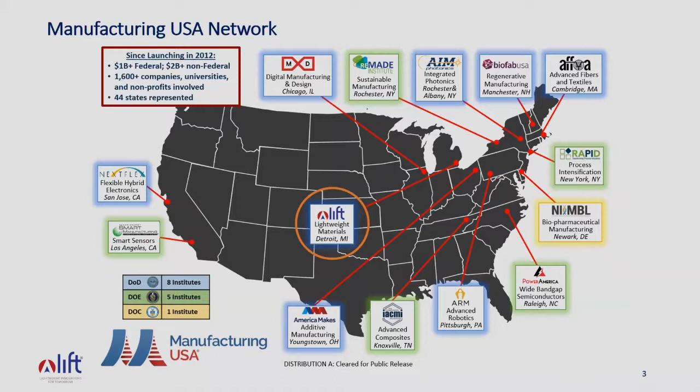And wide bandgap semiconductors over in North Carolina. Some of these institutes are sponsored by the Department of Defense. That is where LIFT is - our main funder is the Department of Defense. There are 8 institutes funded by the DoD, 5 institutes funded by the Department of Energy, and 1 institute sponsored by the Department of Commerce. You can learn more about all of the other institutes either on the LIFT website at lift.technology or at manufacturingusa.com.

A few highlights from what LIFT has accomplished and impacted over the first 5 years: we have over 200 industry, research, academic, and workforce development partners around the country. At any given time, we have had 600 or so engineers, researchers, professors, and economic developers working on LIFT-supported initiatives. Our LIFT facility here in Detroit really has an open door policy - we accept visitors all the time to show them what we're doing, and we've had over 3,000 visitors in the last 12 months. Our work has impacted over 350,000 students and teachers through 40 education and workforce development initiatives around the country.

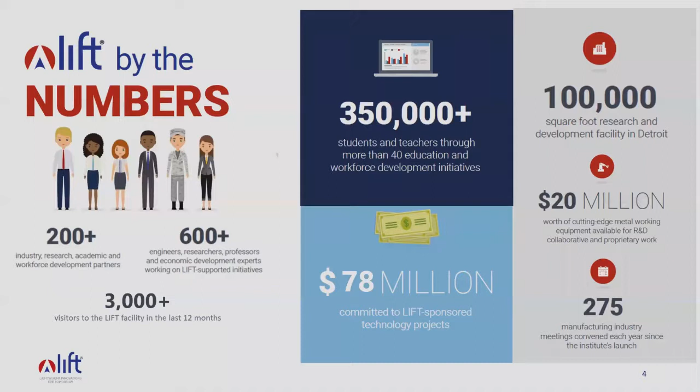We've invested $78 million in technology projects. We are here in Detroit in a 100,000 square foot facility that we share with IACMI, one of the other Manufacturing USA institutes you may have seen on the map in the previous slide. We have $20 million worth of equipment on the LIFT side, so we are very proud of our facility and the work that we've done. I encourage you to come visit us next time you're in the Detroit area, or make a special visit to come check us out and see what we're up to.

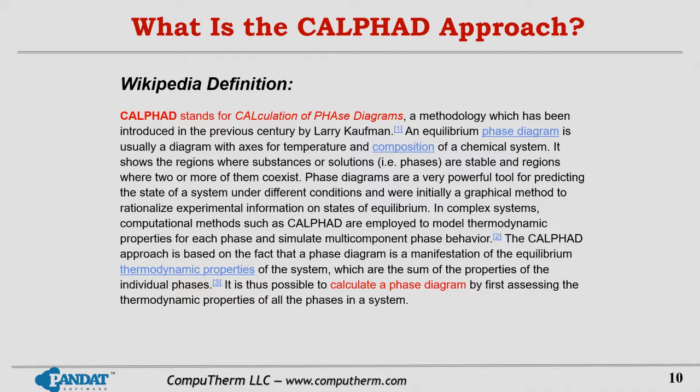So a little bit about the CALPHAD approach - if you Google the definition of CALPHAD, this is what you will find from the Wikipedia definition. Basically, it tells you that Professor Larry Kaufman initiated this idea about 60 years ago. And right now, it has actually become a very important building block for ICME and MGI. As the name stands, CALPHAD, the initial idea of this CALPHAD is for calculation of phase diagrams. Even though its approach has gone a long way now, it can do a lot more than that.

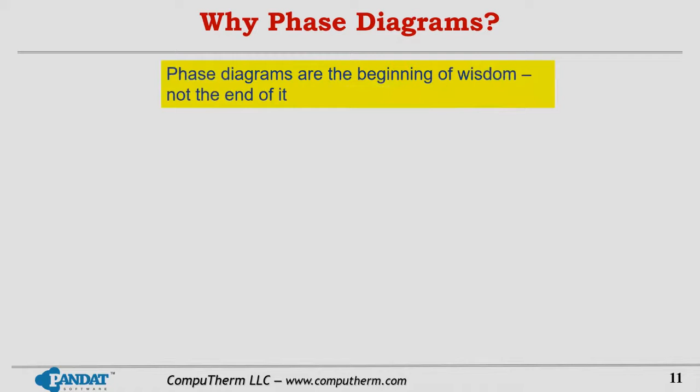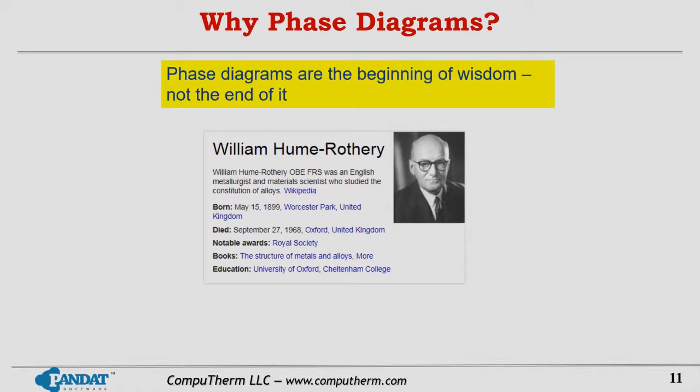Then the next question you may ask is, why phase diagrams? Well, phase diagrams are the beginning of wisdom, not the end of it. This is the famous quotation by William Hume-Rothery. If you do not know this famous person - if you are a TMS member, you know this is a very prestigious award from TMS, which honors those who made significant contributions in the field of material science and metallurgy.

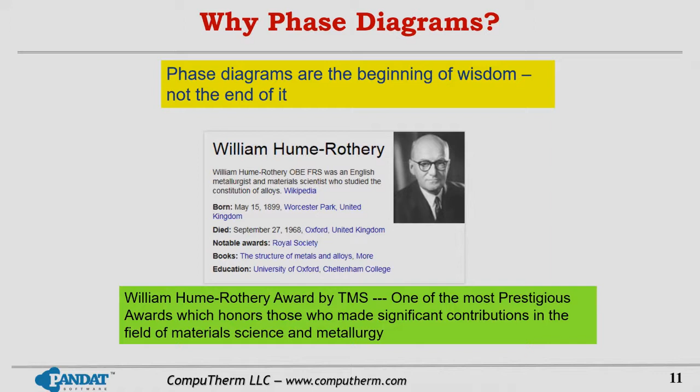Now you say, okay, I agree phase diagrams are very important for materials design. However, I can find a lot of phase diagrams from handbooks. So what's the big deal about the CALPHAD approach? Well, from a handbook, you get the phase diagram. That's what you get, right?

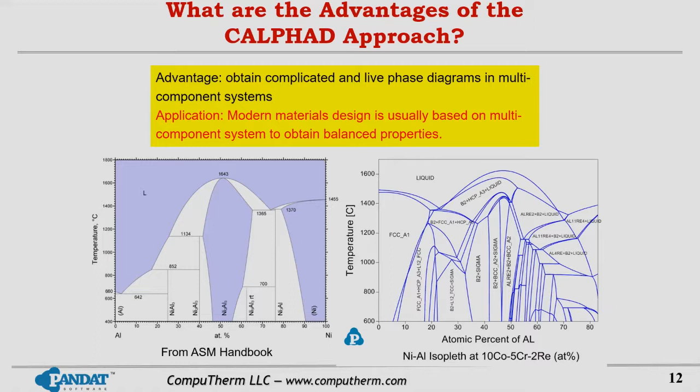Well, this is the advantage of the CALPHAD approach. Basically, we can calculate multi-component phase diagrams, and it's a live phase diagram. You can get a lot of information from the calculation, not only limited to the phase diagram. You can also get a lot of thermodynamic properties and things like that. And this is very important for modern materials design, because modern materials are mostly based on multi-component systems, right?

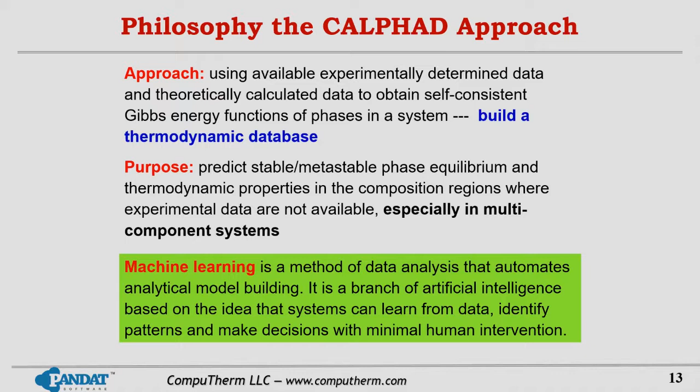So I wouldn't say the CALPHAD approach is a machine learning approach, but if you compare these two approaches, they're based on similar ideas. Basically, we use available experimental data to build models and model parameters, and then we use the models to predict information that we don't get from experiments, right?

Okay, so let's use a quaternary system as an example. You probably will not find any phase diagrams for this quaternary system in any handbooks. However, we know this quaternary system is built up by 4 ternary systems, and each ternary consists of 3 binaries. So these 4 ternaries share binary systems. So in this quaternary system, we have six binaries and four ternaries.

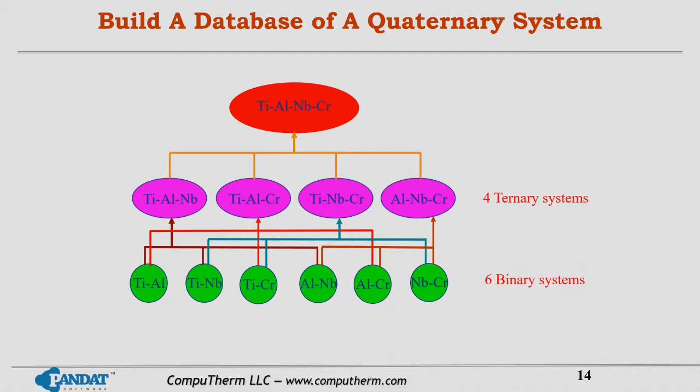So the idea is to use available phase diagram and thermodynamic property data of the binary systems, and also some data from the ternary systems, to build up a database - I mean the models and model parameters - for this quaternary system. Then we can predict the phase equilibrium in this quaternary system.

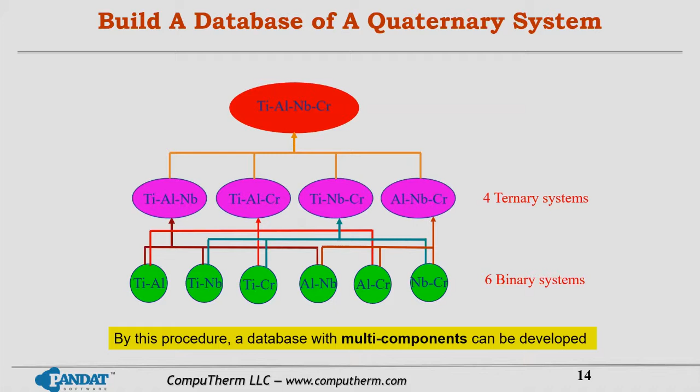So based on this idea, we can build up a multi-component database so we can predict the phase equilibrium information in multi-component systems. So that's basically the idea of the CALPHAD approach, right?

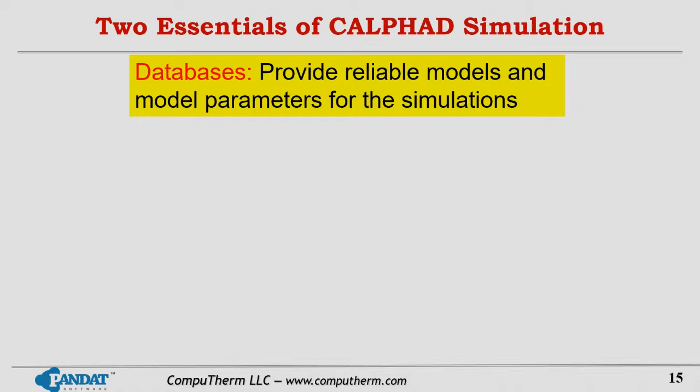But now, okay, I just talked about how to build up a multi-component database which provides reliable models and model parameters for simulation. But that's only one of the essentials of the CALPHAD approach. It's just like you're cooking a meal, okay? Ingredients alone do not make a good meal, right?

So you also need cookware. That's why we need good software to perform the calculations. So basically, two essentials for the CALPHAD approach are: one is the database, the other is the software, okay?

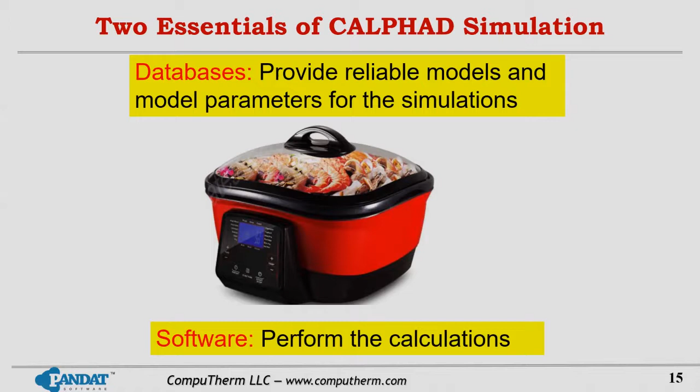So if you search for the software on the internet, you can find a list of software from different companies like Thermo-Calc and OpenCALPHAD, which is also very popular right now, and a few other software packages. PanDAT software was developed by CompuTherm, and we started to develop this software in 1996, as I said, when the company started. The first version of PanDAT software was available in the year 2000.

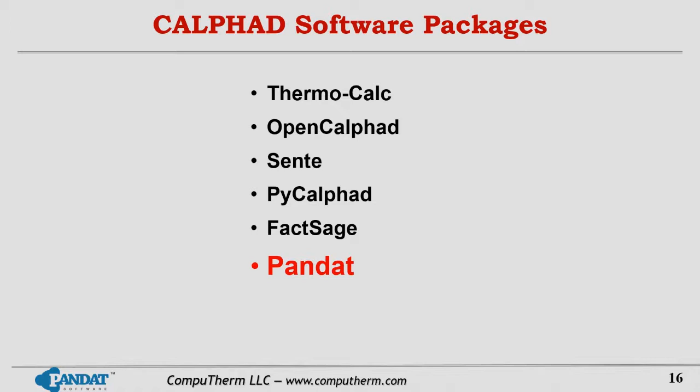At that time, the software really focused on phase diagram calculation. But now this software has become like an integrated platform for simulations - not only for phase diagrams, but also we can do precipitation simulation and diffusion simulation and so on.

Okay, so next, before I talk about high throughput calculation, I want to give an overview of the fundamental features of PanDAT software. It's going to be very brief because I don't have much time to talk about it, but I think it's good to know some fundamental features of the software.

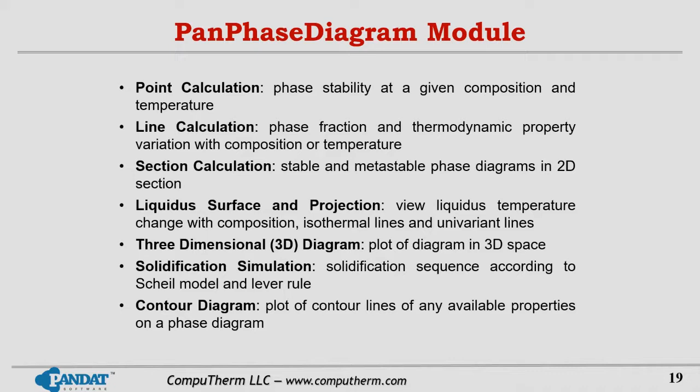I also want to mention that this line calculation is not limited to binaries. You can do the simulation in a multi-component system.

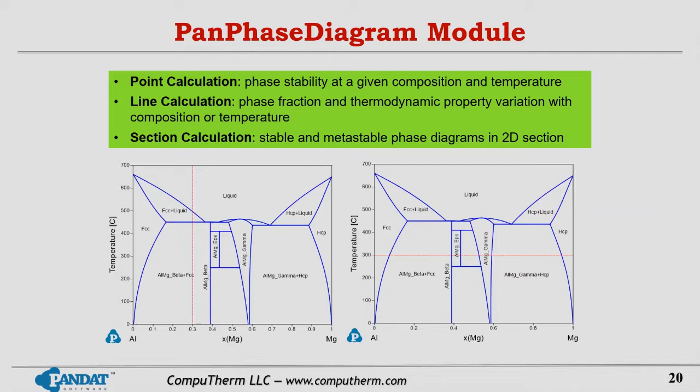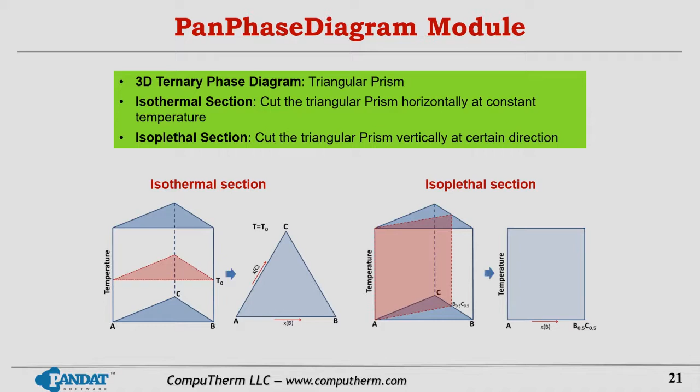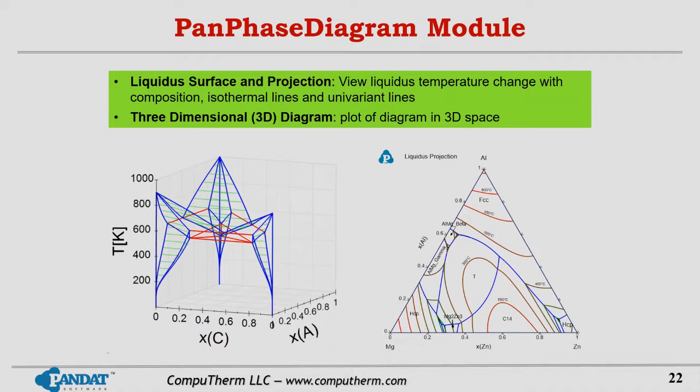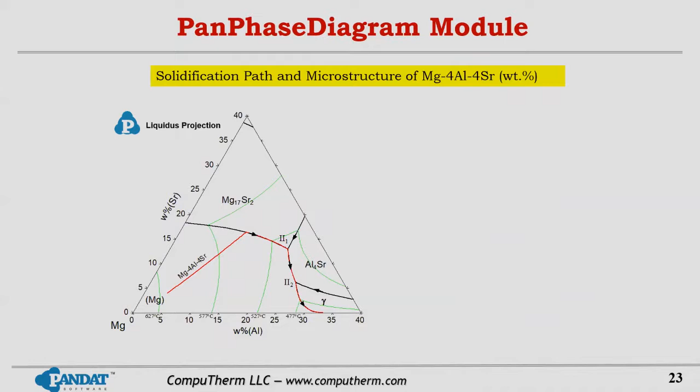For example, if you have a liquidus projection, in this case a magnesium corner, then you have an alloy and you perform a solidification simulation. If you combine the solidification simulation with the liquidus projection, you can see the solidification path and predict what microstructure you can get for this alloy during the casting procedure. This calculation is based on the Scheil model.

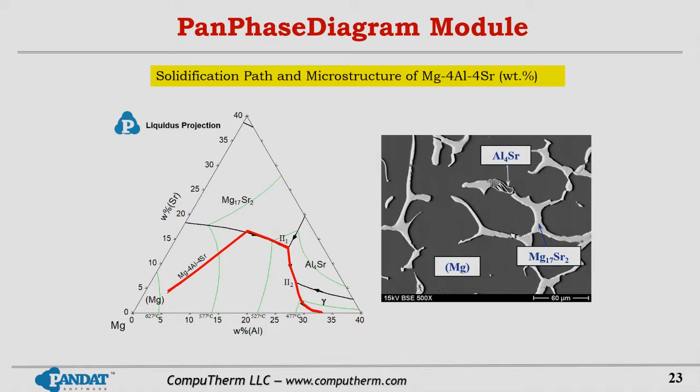Another unique feature from PANDAT software is the contour diagram. In this case, I will use one example to demonstrate how we can use some of the contour diagrams to understand alloy design.

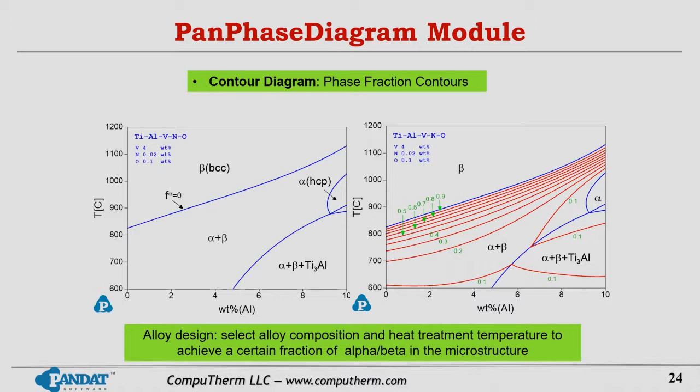However, this alpha beta region is a large region, varying with composition and temperature. It's not obvious how much alpha and beta you can get for a given composition and temperature. However, if we plot phase fraction contours on this diagram, then we can immediately see the fraction of alpha and beta at each composition and temperature. This information is very useful for alloy design. You can select the alloy composition and heat treatment temperature to achieve a certain fraction of alpha phase and beta phase in the microstructure.

Another example is titanium aluminide alloy design. The main feature of titanium aluminide is that it's lightweight, and the composition in the middle of titanium aluminide is basically around 50% titanium and 50% aluminum.

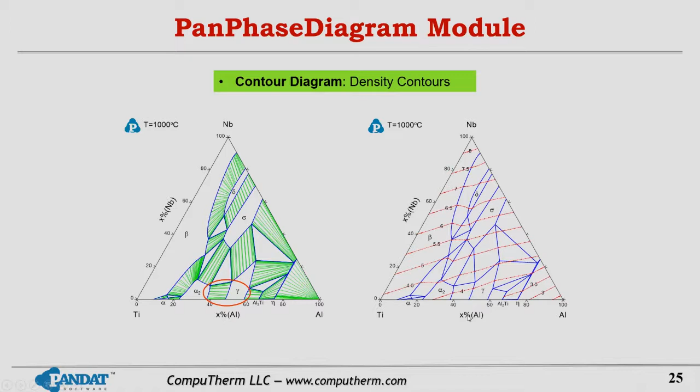Niobium is one of the important additions to titanium aluminide. The question is, in order to reach certain properties while keeping the alloy light, how much niobium can we add? We do not know from this phase diagram alone. However, if we put density contour lines on this phase diagram, we can immediately tell how much niobium we can add while maintaining the density of this titanium aluminide at a certain stage.

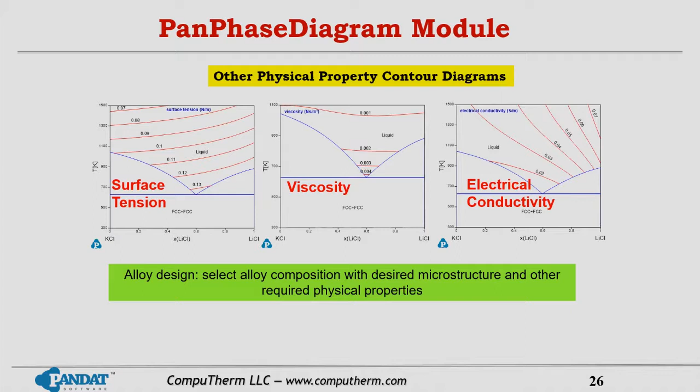This is also very useful information for alloy design. We can plot all kinds of contours of physical properties on the phase diagram. All this information helps users design their alloy to meet both phase stability and the properties, which was the major concern. So that's basically some features of the PanPhase diagram module.

For alloy design, first we need to consider choosing the right composition, so the microstructure will contain the right phases and phase amounts. We also have concerns like melting temperature and density and so on. That's all related to the right composition.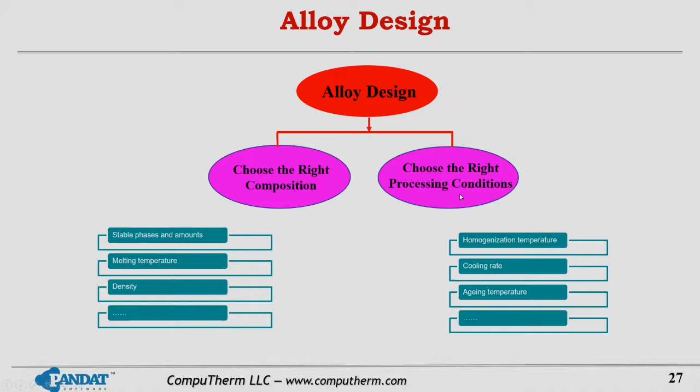But on the other hand, we also need to choose the right processing conditions, for example homogenization temperature, cooling rate, aging temperature, and so on, so we can develop the alloy with the right microstructure and balanced properties, so it has good performance.

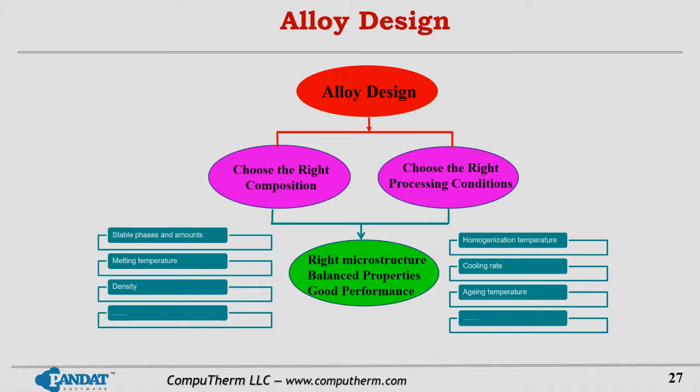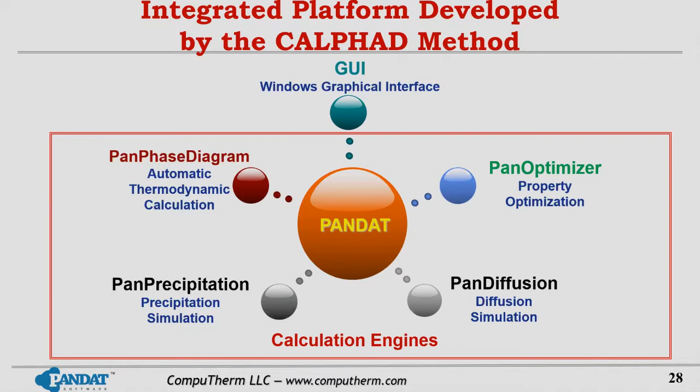With Pandat software, the phase diagram module is mostly focused on the right composition, helping users design the alloy with the right composition. We have also developed two other modules, the Precipitation Module and the Diffusion Module, that can be used to perform kinetic simulations, helping users design the processing conditions. In the next few slides, I want to quickly go through some features of the precipitation module and diffusion module.

The precipitation module is designed to simulate the temporal evolution of average particle size, number density, particle size distribution, and volume fraction. We can also consider co-precipitation or post-precipitation if you have two precipitates, like in Nickel 718, where we have gamma prime and gamma double prime. We can simulate the co-precipitation of gamma prime and gamma double prime.

We can use the module to estimate the interfacial energy, and we can consider heterogeneous nucleation. We can also consider different morphology evolution, not limited to spherical. In the new 2019 version, we also include some strength models for nickel-based superalloys.

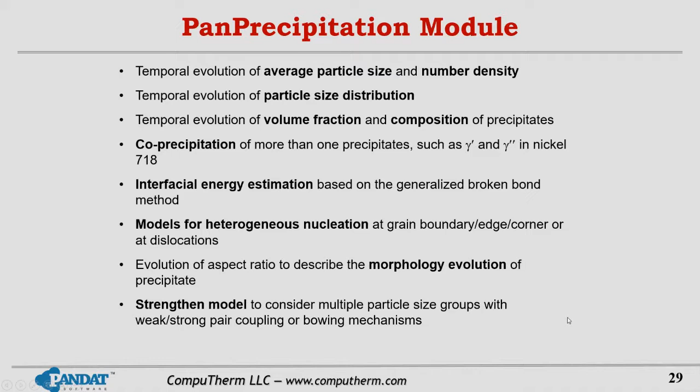I'll give you a quick example. This is the simulation for aluminum alloy 7000 series. This slide shows the particle size evolution and the yield strength evolution with time when the heat treatment condition is held at 160 degrees C for 1000 hours.

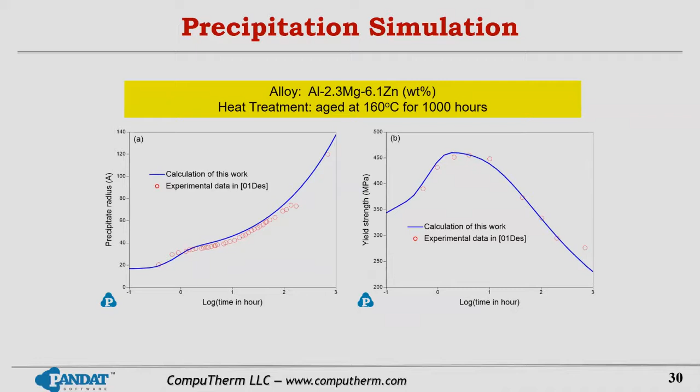With this precipitation module, we can perform virtual experiments. We try different heat treatment temperatures and different cooling rates, so we can play with it to see what's the best heat treatment condition for you to obtain the microstructure you like. This is very important to optimize the heat treatment condition.

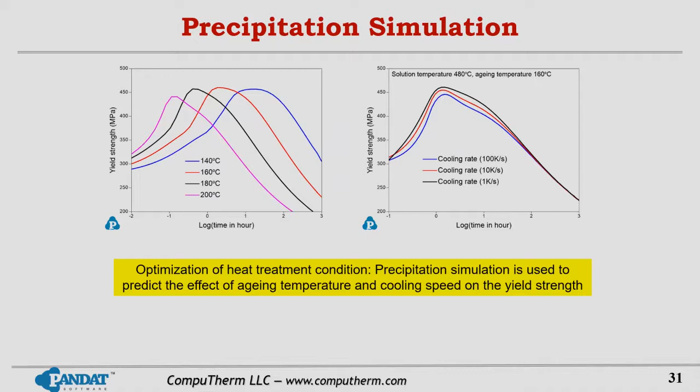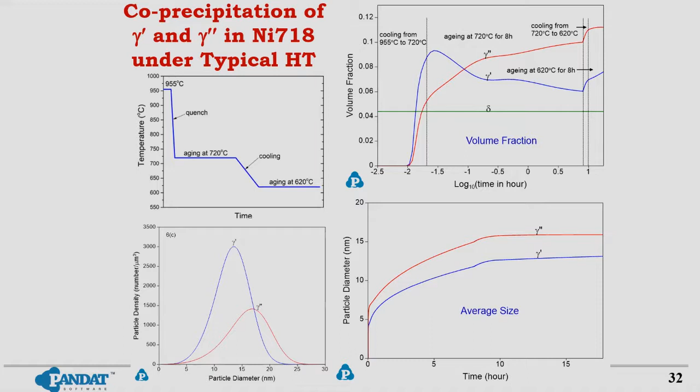This is an example of gamma prime and gamma double prime co-precipitates in a nickel-based superalloy. This is a typical heat treatment condition, and we can use it to simulate how these two precipitates compete with each other during different stages. You can see the volume fraction, particle size evolution, and particle size distribution.

The PanDiffusion module is a new module. It was released last year, but we continue to improve it for the new version. The 2019 version is better, and the 2020 version will come early next year, including new models.

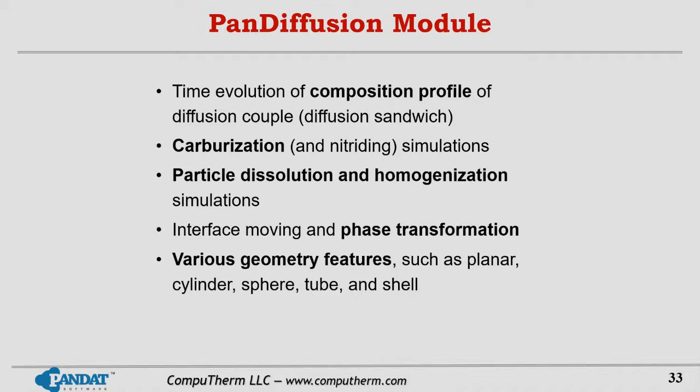It is used to simulate the concentration profile of diffusion couples. It doesn't have to be a couple, it can be a sandwich. We can also simulate carburization, particle dissolution, homogenization, and so on.

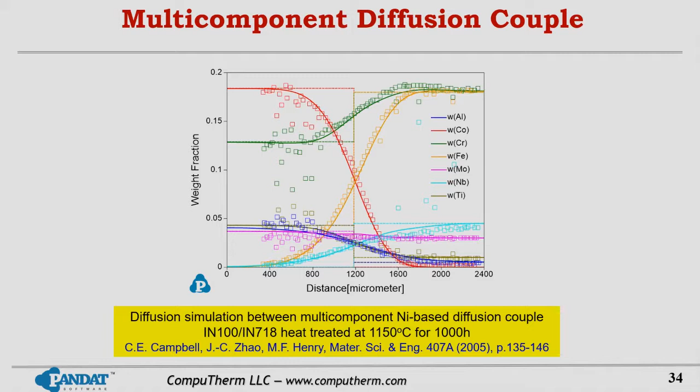This is an example of a diffusion couple, a multi-component system. The left side is IN100, and the right side is Inconel 718, both being nickel-based superalloys with multi-component systems. As you can see, we can simulate diffusion between this multi-component diffusion couple.

The particle dissolution is one of the important applications for diffusion simulation, because we can calculate how particles form during solidification and how they dissolve during homogenization treatment. So you can optimize the homogenization temperature and time, dissolving these particles quickly while also saving energy.

Because of time constraints, I don't have time to go through all the details and examples of the simulations. That gives you a taste of the basic features of Pandat software.

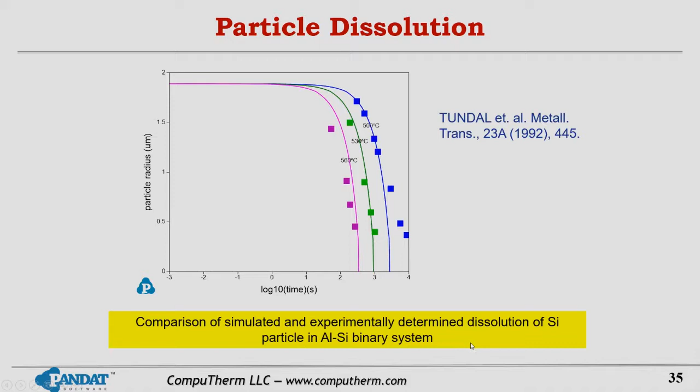The next part I want to spend more time on is high throughput calculation for alloy design. The idea of high throughput calculation is to perform thousands of calculations altogether at user-defined compositions in the multi-dimensional composition space. After the calculation, we can do data mining of the simulated results and identify the alloy compositions that meet users' requirements. The purpose is really to accelerate alloy development by design.

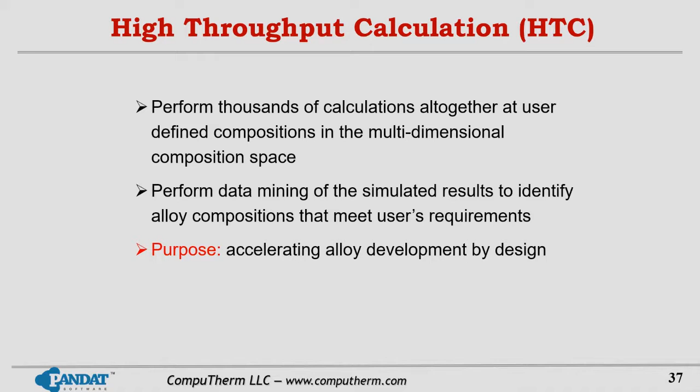Here are the steps for high throughput calculation. The first step is the user needs to define the compositions, what you want to calculate. In this case, I just gave an example listing a bunch of elements. For each element, we need to give a starting composition, an end composition, and the number of steps you want for the calculation.

In the second step, the software makes the combination of all these settings and performs the calculation for thousands of compositions. After the calculation, in step three, the user defines the search criteria: what properties are of major concern, what properties you're looking for.

In step four, the user performs data mining on the simulated results to identify the alloy compositions. Then in step five, the software presents the search results either as a table, listing all the compositions for the user, telling them these are the compositions you're looking for based on your criteria for the properties.

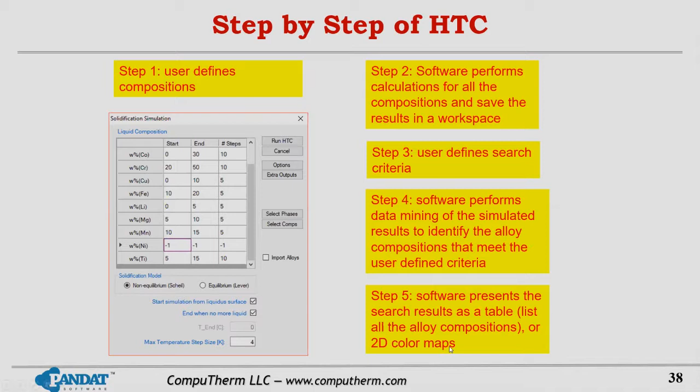The other way is to show some color maps, like 2D color maps. Next, I will show you a few examples of using high throughput calculation for alloy design.

The first example is to search high entropy alloys in this aluminum, chromium, iron, manganese, titanium 5-component system, using a user-defined composition space. It is 5 components, and each component's composition varies from 0 to 50%, with a 5% step size for each element.

The total number of compositions defined this way is 3,246. We perform high throughput calculation for all the compositions, and then the user defines the screening criteria. For example, criterion number 1 is that the melting temperature should be higher than 1250, and the first solidified phase should be BCC phase, which is basically the matrix phase.

The second criteria is that at 0.8 of the melting temperature, we want to have 2 phases: the matrix phase BCC, plus some precipitate phase, L21. The precipitate phase should be smaller than 50%. The third criteria is we want to keep this 2-phase structure stable until 50% of the melting temperature.

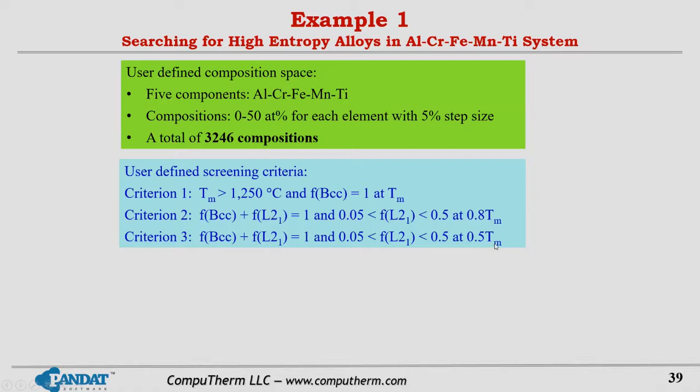From these criteria, we data mined the simulated results and found the number of alloys meeting criteria 1 to be 1,168. For alloy compositions meeting criteria 1 and 2, we have 44 alloys. For alloy compositions meeting all 3 requirements, we have only 8 alloys. So we down-select from a total of about 3,200 alloys to 8 alloys for experiments, for experimental validation.

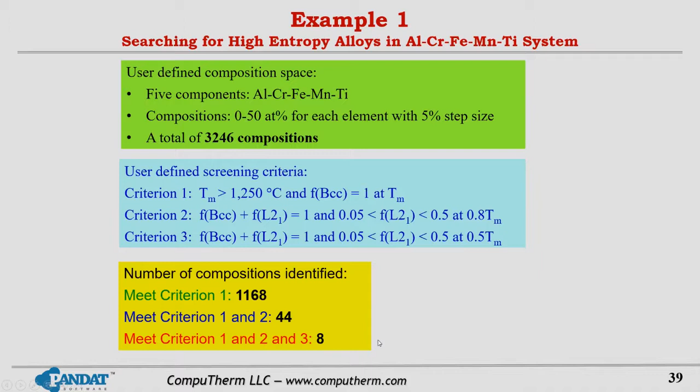This work was collaborated with Professor Liaw's group at University of Tennessee. They performed some comparison tests, and they did find a couple of alloys—at least 2 or 3 of the 8 alloys—that have very good properties.

So this example really demonstrates the alloy design idea. We can use high throughput calculation to screen a wider composition space, and then down-select a few potential alloy compositions for experiments. It really accelerates the design significantly.

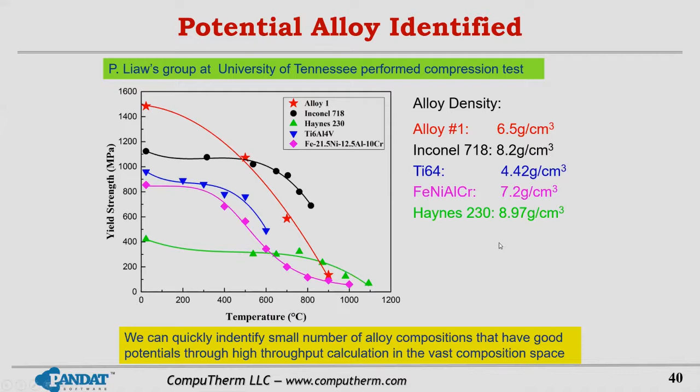The second example is to search compositions with high potential to form bulk metallic glass. Actually, this work—we did some of it about 10 years ago—used phase diagram calculations, CALPHAD, to search the compositions for bulk metallic glasses. We found that

most compositions with high potential to form bulk metallic glass are at low-lying liquidus temperature. At that time, we were able to find some compositions that form bulk metallic glasses, and the predictions were quite successful. However, this type of simulation is not so easy. If you are not an expert in the CALPHAD approach, you do not know which sections to simulate, so it's not easy for everyone to identify compositions with potential.

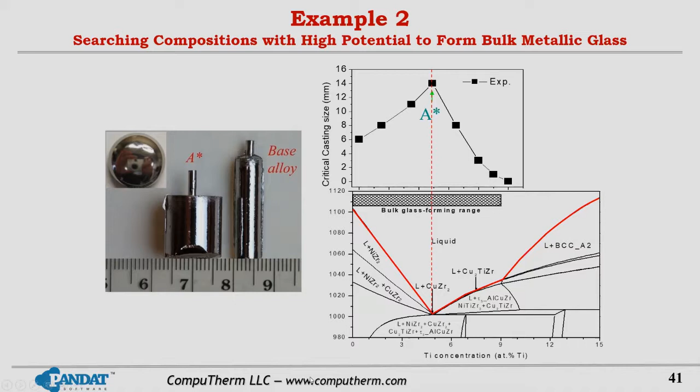Recently we revisited this bulk metallic glass prediction and used high throughput calculation for this application. Here, in this aluminum-copper-zirconium ternary system, we calculate the liquidus temperature for several hundred alloy compositions.

We present the simulated results as a color map of liquidus projection, liquidus temperature. Those solid points are compositions already identified experimentally as forming bulk metallic glass. As you can see, they are all located in the low liquidus temperature region.

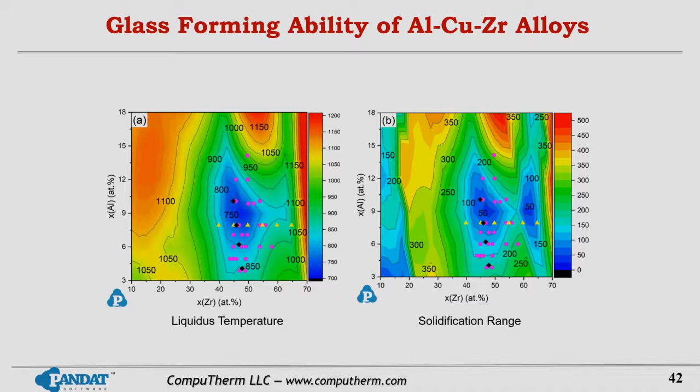We can also plot another color map, the solidification range, which also seems to be a good indicator for BMG formation. We performed simulations for some other ternary and higher-order systems, and it seems like high throughput calculation gives a really good indicator for searching bulk metallic glass compositions.

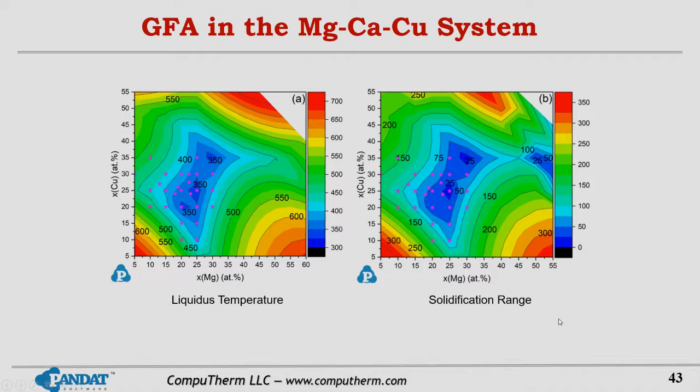Now I have a third example, used to predict crack susceptibility during solidification. In 2017, Liu and colleagues published a paper in Acta Materialia, proposing an index which can be used to estimate the crack susceptibility for different alloy compositions in aluminum alloys.

However, if we use this index alone to evaluate alloys, then we can only do it alloy by alloy.

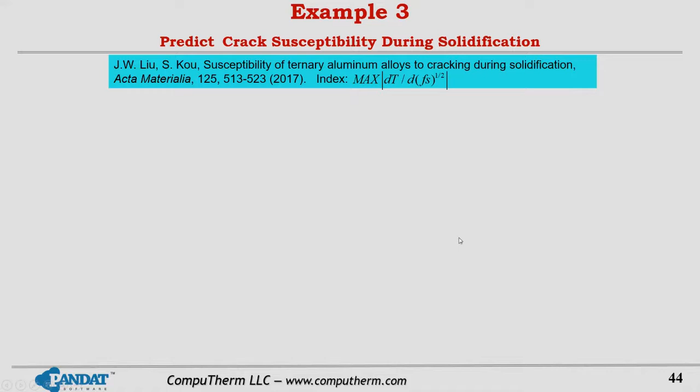We give an alloy composition and use this index to evaluate its crack susceptibility. I don't want to go into all the detail about how this index was developed, but I want to show we can use high throughput calculation to develop a cracking map.

So the take-home message for this simulation is that high throughput calculation is very useful to develop a cracking susceptibility map. Also, for the solidification simulation, considering back diffusion provides a more sensible prediction for the cracking susceptibility.

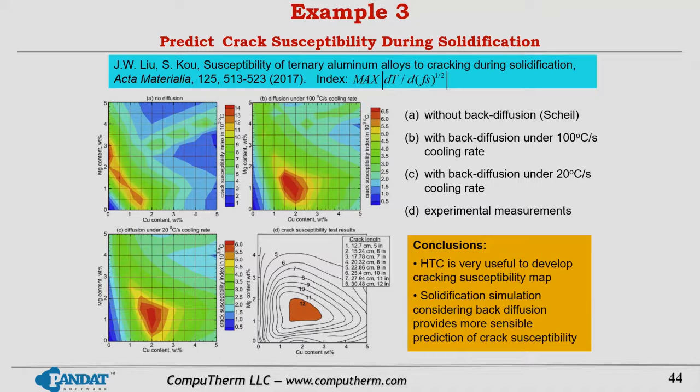All right, so I just used 3 examples to demonstrate how we can use high throughput calculation for alloy design. In the next few minutes, I want to talk a little bit more about the application of CALPHAD simulation tools — that's application to oxidation and corrosion.

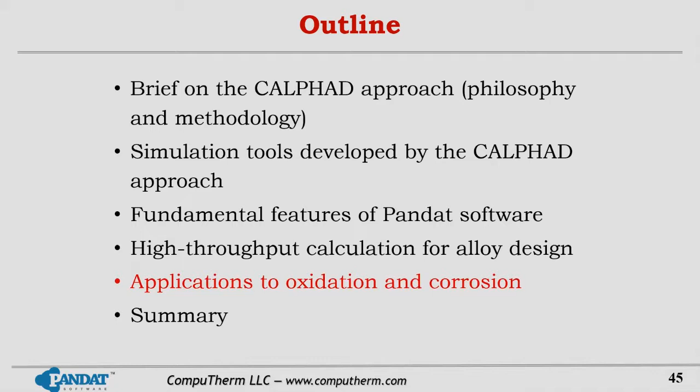The first example is sodium sulfate induced hot corrosion. As we know, hot corrosion occurs in marine gas turbine engines due to the rapid degradation of high temperature alloy components.

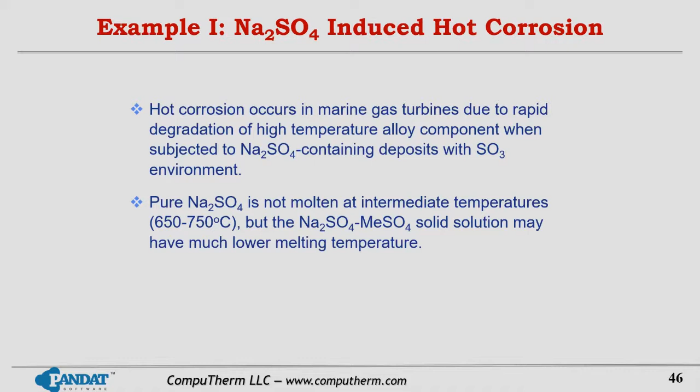This happens when it is exposed to sodium sulfate containing deposit and also SO3 gas environment. We know that sodium sulfate is not molten at intermediate temperature, such as 650 to 750, which is mostly the application temperature. But when sodium sulfate forms a solid solution with other metal sulfate, the melting temperature can decrease quickly.

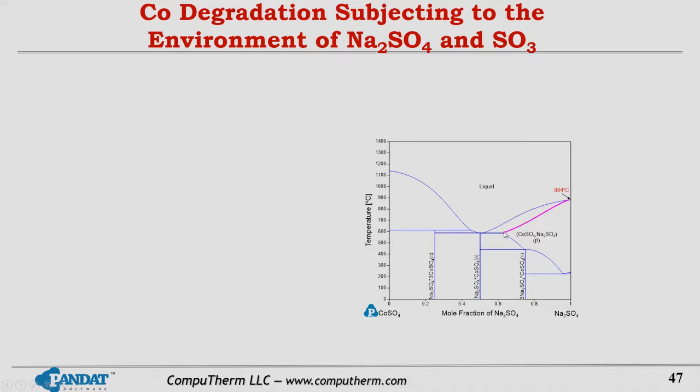So now the question is, when we use a turbine engine, for example right now we have cobalt. We use pure cobalt as the turbine material, and it will oxidize with oxygen to form cobalt oxide. Then with this environment, SO3, it will form cobalt sulfate, and then cobalt sulfate with sodium sulfate forms this beta phase. That's the solid solution.

Now the question is, if I want to use this material at 700 degrees C, how stable is the beta phase? If beta phase is stable, then this material is probably safe. And what is the maximum SO3 partial pressure the beta phase can tolerate at this application temperature?

From this diagram we cannot tell that, but if we plot the partial pressure of SO3 contour lines onto this diagram, then we can tell that the cross point at 700 and the melting temperature, the partial pressure of SO3 is 10 to the minus 4.53.

What does this mean? This means if in the environment the partial pressure of SO3 is lower than this value, for example minus 5 or 6, then the beta solid solution is stable. It's solid state, so the material is probably okay.

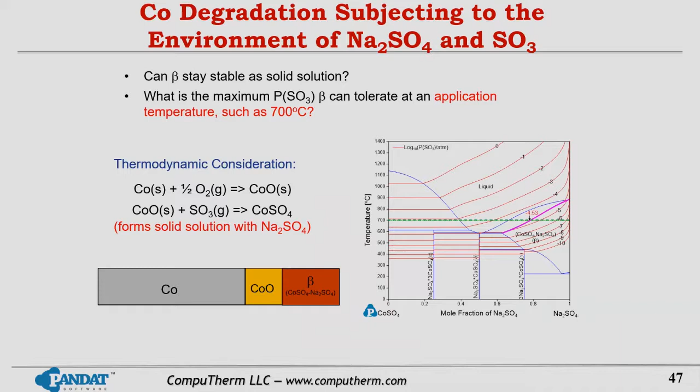However, let's say we add some nickel to cobalt, and consider how the tolerance of beta phase will be. So in this case, for example, we add 20% of nickel in cobalt for this cobalt 80 nickel 20 alloy. Then we can calculate this highest tolerance of partial pressure — it increases a little bit.

But if you add more nickel, let's say now we become a nickel alloy, nickel 80% and cobalt 20%, then the tolerance becomes even higher. So this means nickel is more corrosion resistant in this application.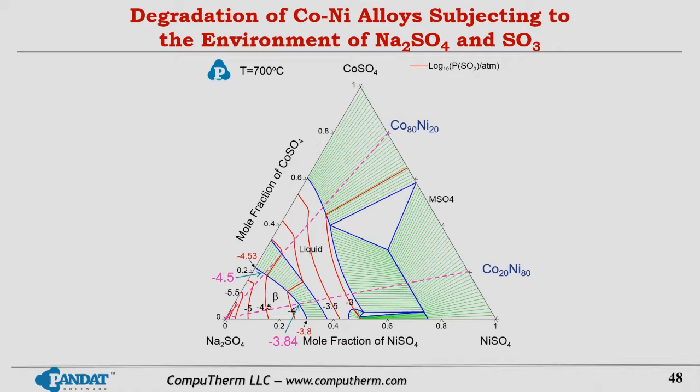From this simulation we know we have this idea for alloy design — we can add different components to see how they can improve the corrosion resistance for the marine application. And the second example is corrosion of alloy in the salt-cooled molten salt reactor.

So basically, in this example, we know that the protective layers of reactor component will tend to dissolve in fluoride salt, which will lead to continuous material attack and eventually the loss of structural integrity.

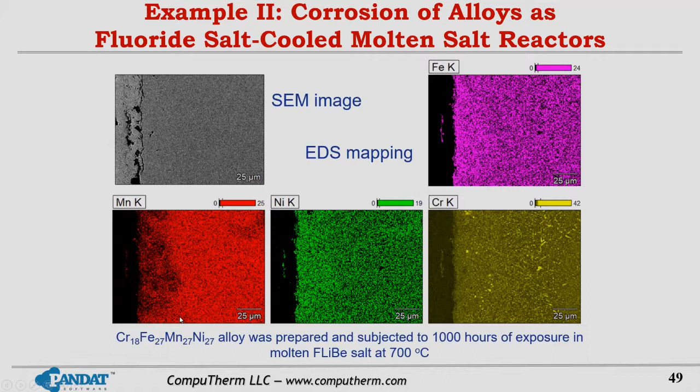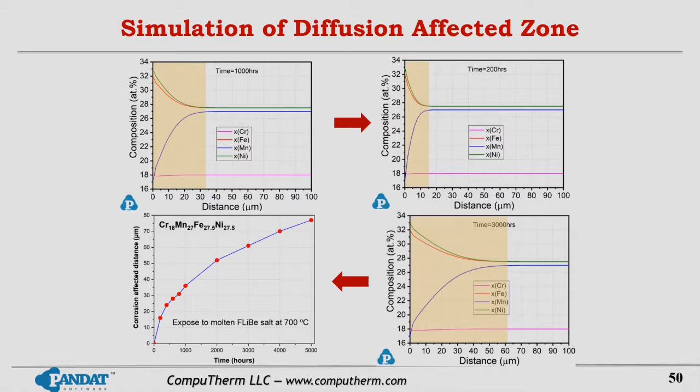And from diffusion simulation, basically we can use available experimental data to calibrate the flux and so on information, and then we can simulate the diffusion affected layer. So this first plot is for 1000 hours, and the second one is for 200 hours. Then we can project it to even higher numbers of hours, like 3,000 hours, and so on. Then we can project how long this reactor material can be used before the diffusion layer is too large, okay? So that's another application to use CALPHAD simulation tools to understand the corrosion behavior of material.

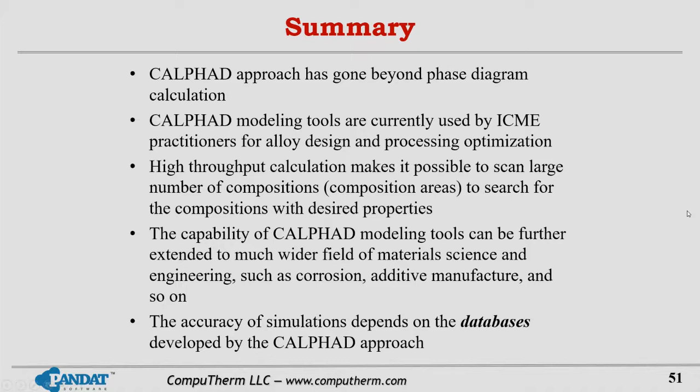So I know we have 5 minutes, so I want to leave a few minutes for questions. This is basically the summary of my presentation. CALPHAD approach has gone beyond phase diagram and has become a very useful tool for ICME practitioners, alloy design and processing optimization.